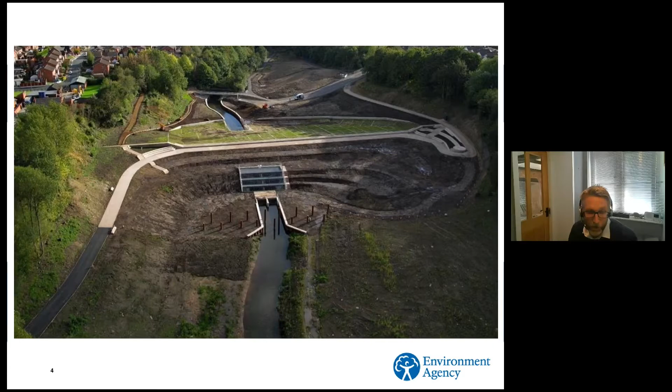But it's really key that we don't miss out the key part, that it's about getting the right construction solution from the outset, and in some cases there may not be a construction solution. So that's a key part of our approach, and making sure that our business case processes and other processes make sure we get the right solution from the outset before we then look to optimize delivery of that solution and reduce carbon as part of that.

So when we are looking to reduce the carbon in the way that we deliver the schemes, we knew what our priority areas were in terms of where the carbon sat, both embodied and whole life, and primarily the focus is on embodied carbon in our construction activities, because our assets tend to be in the main civil assets, and relatively high embodied carbon, apart from the pumping stations, which is a separate piece of work going on there.

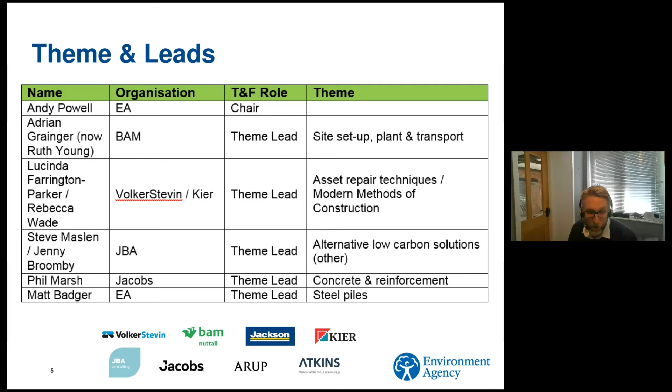But whilst we had leads, they were supported by many other colleagues in other organizations that work with us, helping to bring together proposals, comment on proposals. It's a really useful exercise to go through that, to see how we can challenge our engineering requirements. And in effect, this is all about looking at innovation and best practice, which is already out there, and making a decision to make that business as usual together. So I'm going to take you through some of those as just high-level examples.

So in terms of concrete and reinforcement, we've done some work and knew that if half of our total carbon footprint is from construction, more than half of that is from concrete use in our construction activity. So a really good area for us to focus on, which we did. There's a range of ways that you can reduce carbon in concrete, right through from design through to specification. But ultimately, we agreed on an overall requirement to use the lowest carbon concrete to meet the performance requirements, and then we've produced a set of specific requirements that sit under that and some guidance.

So in terms of summary, it's looking at maximizing the amount of cement replacements whilst achieving performance requirements within the concrete standards for most of our critical structural uses, but then maximizing opportunities to use some of the even lower carbon concretes that are on the market and emerging onto the market as well, and looking at alternative reinforcements to steel as well.

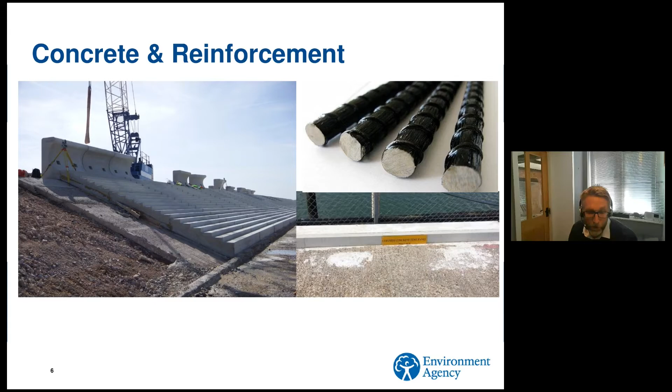So with a combination of that approach, we think we can save something like 50% of our construction carbon footprint, so something like 25% of the overall footprint, so really significant.

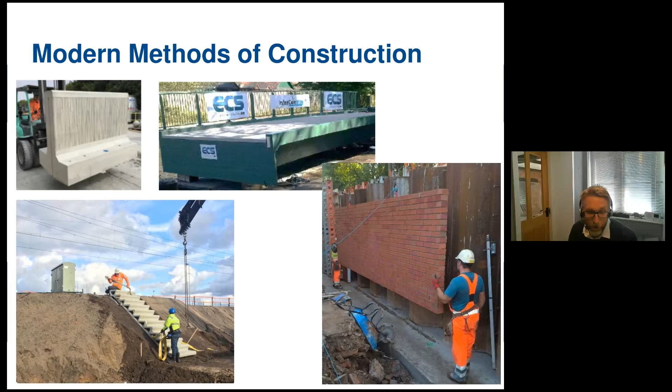But overall, we agreed this is quite a significant piece of work that we needed to do as a separate project. So there's not much in our engineering requirements about this, other than that we should look at it as a default for MMC, modern methods of construction, where possible, but check whether that's the right approach each time for hard assets.

Then we looked at steel piles. A lot of this was around looking at alternatives to steel piles in terms of lower carbon solutions, whether that be things like plastic piles or trench mix solutions for below ground cut-off walls, etc. Then looking at design optimization when we're using steel piles, and finally the carbon assessment around the piles that you are using in terms of specification and sourcing as well. There are some interesting products coming onto the market in that area as well.

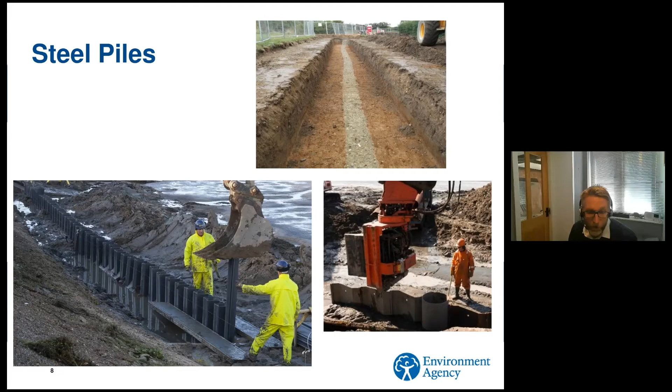And then site setup. This was a really interesting area where in the main we look to have mains connection for our construction projects, but that isn't always feasible, particularly for some of the shorter duration projects, or where we've got satellite pockets of work going on with satellite compounds, etc. So where we haven't got mains connection with the eco tariff, we'd be looking for the lowest carbon solution in terms of energy provision, cabins, etc., using a range of different solutions, but ultimately looking for that optimization to happen up front.

And alternative fuels are again a part of that mix. We're seeing some good work in that area with lots of trials and pilots of different renewable solutions, complementing some more conventional solutions like diesel generators. But often we're seeing the diesel being swapped out for alternative fuels, which we'll come on to.

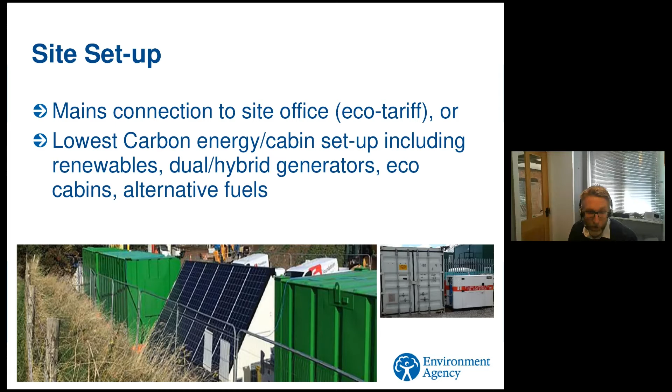And then in terms of site, plant and transport, we recognise this is an area where there's an awful lot of emerging technologies, and technologies which are maybe not widely available at the moment. So it made it quite hard to have a widespread blanket requirement. So what we did here is have a hierarchy approach: again, the lowest carbon option meeting the performance requirements of the job, moving from things like electric plant, hydrogen, hybrid plant, through to conventional plant with alternative fuels.

But importantly, that being the minimum requirement without prior agreement from the Environment Agency project manager. And we're seeing quite significant movements as a result of that in terms of how we're fueling our plant on site.

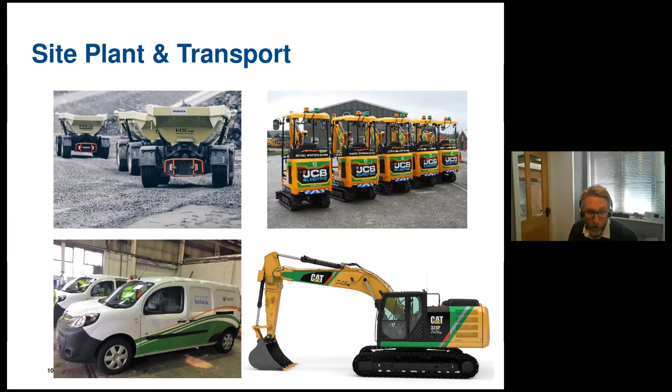So moving into alternative fuel. We're often talking about HVO fuels, and we're seeing a really big change in provision on site. In effect, it's a swap-out option for diesel in a lot of plant. A site I was at on Friday didn't have mains connection, and they had HVO in the generator that would have been a diesel generator on that site. I'm seeing that across a lot of our projects now. So I think that minimum requirement is pushing people to look at that option. But at the same time, we are seeing other solutions being piloted and trialed.

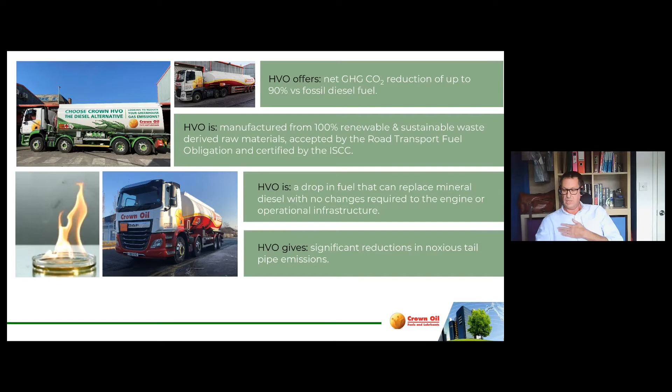We would use that fatty acid if we were making biodiesel. Rather than hydrogen, we would have methanol, and we would react the fatty acid with methanol to produce an ester, biodiesel. In this instance, because we're using hydrogen, in essence we knock the oxygens out of the molecule, and then all you've got is carbon bonded to hydrogen, a hydrocarbon. That's a paraffin structure. That is the good bit of diesel fuel. Diesel fuel is a blend of different refined products, some of which are good paraffins, some of which are not so good in terms of the overall operability of that fuel.

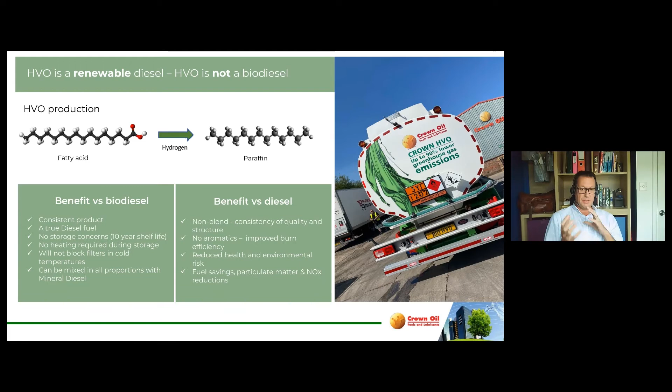In terms of the CO2 saving, it's all about life cycle. So the HVO life cycle, i.e. the difference between the emission of CO2 and then the sequestration of the CO2, is around about one growth cycle. It's a plant-based product. Indeed, it goes one step further, because it's a waste-based, plant-based product. So the carbon footprint of the growing of the plant initially is put to the original purpose of that product. So in the case of Crown HVO, that would be the production of cooking oil.

Fossil fuel, obviously, is actually plant and animal based. It just happens to be dead dinosaurs from 2 billion years ago. And that's the issue. The fossil life cycle for carbon is millions and millions of years difference between the emission and sequestration of that CO2.

If you think about it, the crude oil that we have in the Earth's crust today is a carbon sink of millions of years worth of carbon, and we've let it go within roughly 150, 250 years, which has increased the overall concentration of CO2 in the atmosphere. That doesn't happen with HVO. What goes up, 90% of which comes back down within a year.

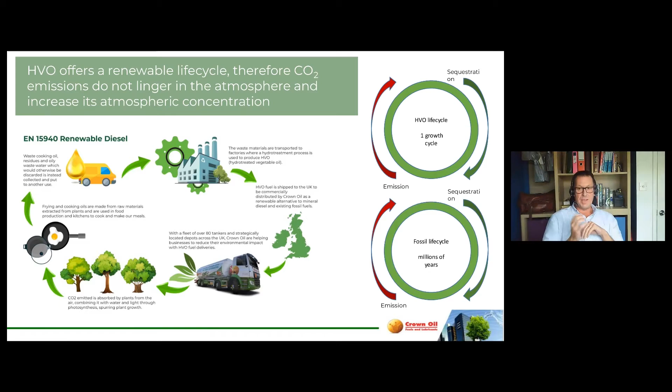So since we first started this journey with HVO now 3.5 years ago, it was at that time a pretty difficult conversation to be had. Why? Well, it costs more money. I'm not going to put that biodiesel muck into my engines, etc., etc. But we've had a fantastic growth period. We've proven the benefits of the fuel, and ultimately we're seeing HVO being taken up across the board,

really. We have fuel operating in fleets, in delivery fleets. We have local councils and government agencies taking up the fuel. My local council down here in Poole is running their dust cart fleet on HVO. So every Monday morning I give it a little wave as I see my bins being collected. James will talk a little bit more about what Land and Water are doing with the fuel.

We are within the data centre in the emergency power sector, and of course, although it's not represented on this slide, we are also operating in the rail industry as well, with trials pulling 7,000-ton trains, and the fuel has operated faultlessly across the piece. But looking a little bit further in marine, we are slightly hampered with HVO and biofuels in general in marine, in as much as the RTFO doesn't allow for the claiming of RTFC tickets in anything other than inland waterways, which means that the fuel is pretty expensive for international marine fleets.

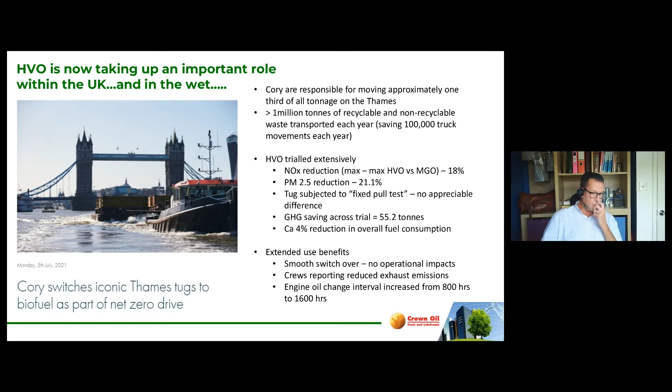So in terms of NOx reduction, we saw 18% NOx, 21% plus reduction in particulate matter. Over the trial, we saved around 50 tonnes of CO2, and importantly, Cory now see around about 4% reduction in overall fuel consumption, but also they've been able to double their engine oil change interval from 800 hours to around about 1600 hours. So there are ongoing savings for Cory as they continue to operate.

And I see I'm running out of time, but just to round off, HVO is now proven. Its benefits are tangible. It's got legislative backup. Its performance is very well accepted. It's definitely environmentally beneficial. You have a fast and simple step toward net zero, with importantly no capex requirements, and certainly its operability in the field is under no question.

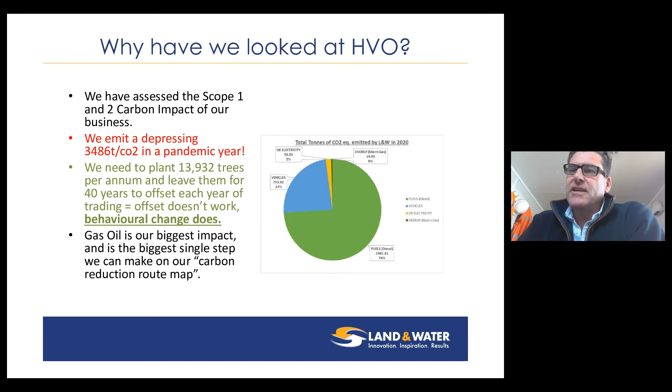But the biggest single decision right at the front of that route map, the yellow brick road, is the reduction of gas oil impacts. And I think HVO is an intermediary technology. Because we can use it now, it's a simple win. It might well not be the end game, but it is certainly a lever we can pull right now, and it has a significant impact.

So let's look at the advantages. And we did work with Crown Oil on an extensive trial, and I will come on to that in a minute. But ultimately, the advantages are considerably lower carbon than a fossil fuel if we consider the 1 year cycle versus releasing mineral oils from 4 million years ago. Lower NOx and lower particulates.

It can be mixed in the tank and therefore mixed with the existing gas oil, thrown straight in and used. And we tried that and it worked. It's available off highway and as a white diesel. There's no risk of diesel bug because it doesn't have the ester link that you've heard about from Simon. And importantly, it has a 10-year storage life, because we were finding coagulation and diesel bug in our bowsers using conventional biodiesels. We also noted considerably extended filter life and service intervals, the same as the Cory's trial.

And there's less risk of waxing in the cold temperature, particularly when we conducted the trial. It looks really sunny in that photograph, but it was a miserable February and March. Also importantly, because much of our work is in sensitive habitats, it's a biodegradable product. And I think we've all made a big move in industry looking at biodegradable lubricants. Our entire fleet is biodegradable, including our tugs. But actually the fuel was still mineral based. So having a biodegradable input fuel is significant in terms of risk management.

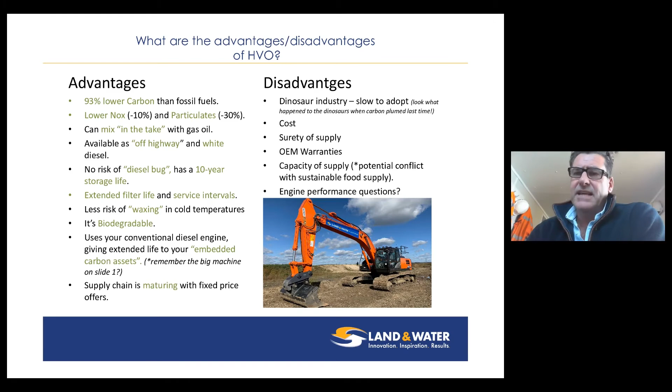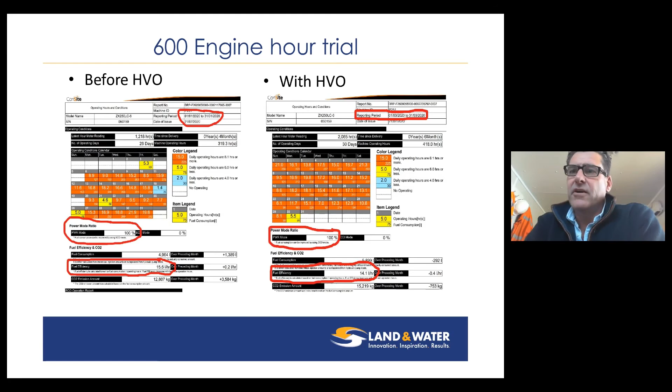We've also run it in our older tugs. We've run it in very old equipment as well. And we couldn't find any discernible impact. So that's real live data that's come out of a real live trial, working the machine as hard as is almost humanly possible.

So what have we learned about it? We've learned it's easy to use. We've learned we don't require any engine modifications whatsoever. We found it's readily available. We have this 3 to 4% saving by volume. We have lower carbon and lower overall emissions in particulates and NOx. No operator training was required to adopt it. We put it straight into the bowser and it was used conventionally. It runs on all engines that we tested, old and new. And more recently, our supply chain hirers are adopting it, and the cost is close to the gas oil equivalent.

So the decision that we've made across the group is to switch all land and water companies to 100% HVO by the 1st of November this year. So we've been running it on and off for a whole period. We've made the decision and we're implementing now, and we're spreading that across 2 suppliers so that after a 3-month or 4-month trial period, we can decide which supplier is giving us the best service. So we believe it works. We've tried it as hard as we can and we can't break anything, and our supply chain is beginning to move with us. Thank you very much indeed.